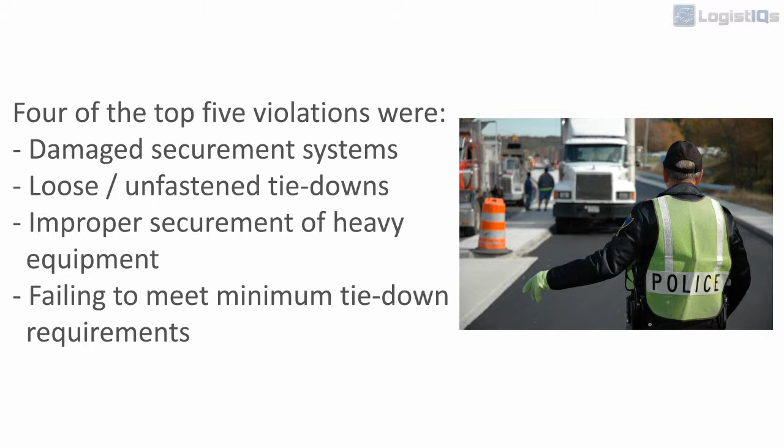In the cargo securement sphere, the most common violations found during inspections were failure to prevent shifting cargo and leaking, spilling, blowing, falling cargo. 4 of the top 5 violations were damaged securement systems, loose or unfastened tie-downs, improper securement of heavy equipment, and failing to meet minimum tie-down requirements.

Why must cargo be properly secured? The same forces you feel acting on your body while driving also act on the cargo you are carrying. Those forces are inertia, the feeling of being pulled forward out of the seat when you apply the brakes. It also applies to acceleration.

Unsecured cargo will fall forward during braking and backwards during acceleration. Centrifugal force is what pushes you to the side of your seat when you go around a curve. Unsecured cargo can fall sideways. The higher the speed in the curve, the greater the effect.

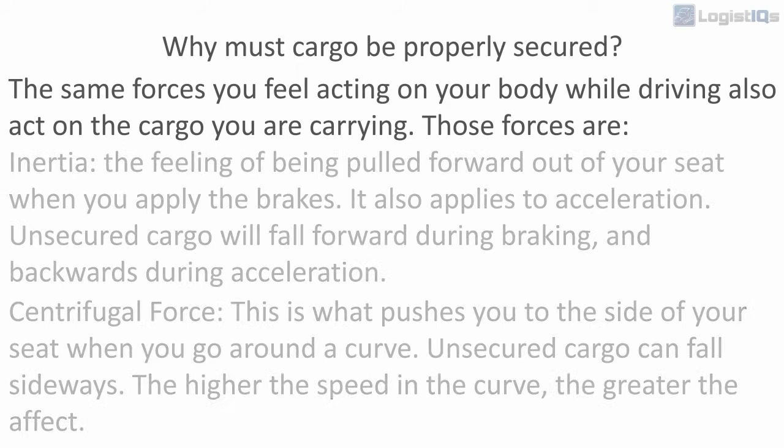Gravity: when driving on a flat surface, gravity pushes directly downward on cargo. However, when going up or down a grade, gravity will push unsecured cargo the direction of the grade.

The NACSS requires that cargo must be contained, immobilized, or secured. It may not leak, spill, or blow, may not fall from or otherwise become dislodged from the vehicle, or shift upon or within the vehicle to an extent that the vehicle's stability or maneuverability is adversely affected.

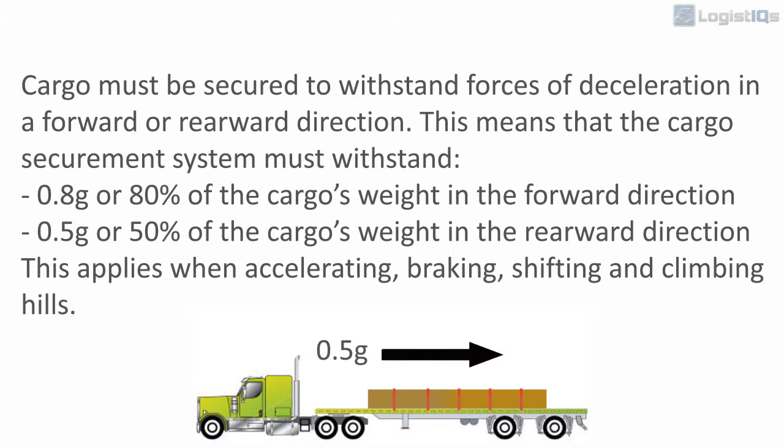Cargo must be secured to withstand forces of deceleration in a forward or rearward direction. This means the cargo securement system must withstand 0.8 g, or 80% of the secured cargo's weight, in the forward direction, and 0.5 g, or 50% of the cargo's weight, in the rearward direction. This applies when accelerating, braking, shifting, and climbing hills.

The cargo must also be secured to withstand lateral forces. It must withstand 0.5 g, or 50% of the cargo's weight, in either side direction. This applies when turning, braking while turning, and changing lanes.

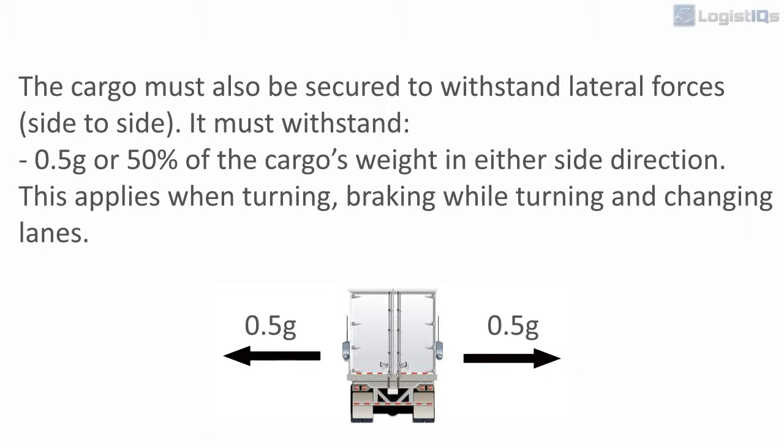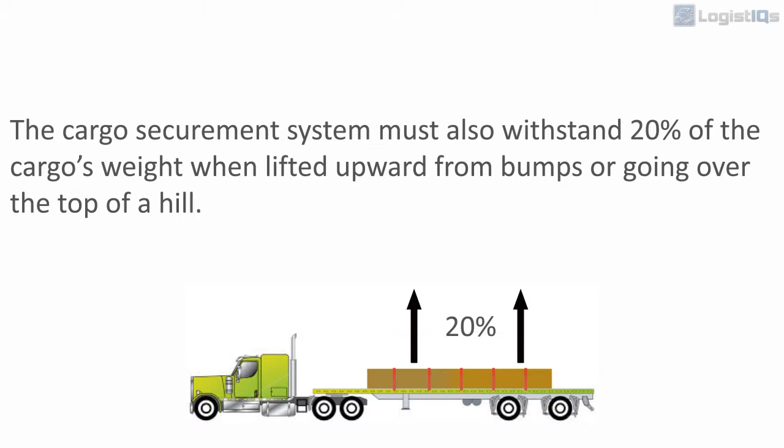The cargo securement system must also withstand 20% of the cargo's weight when lifted upward from bumps or going over the top of a hill. Securing the cargo with tie-downs will usually meet this criteria. If the cargo is fully contained in a strong enough structure, it may also meet the requirements.

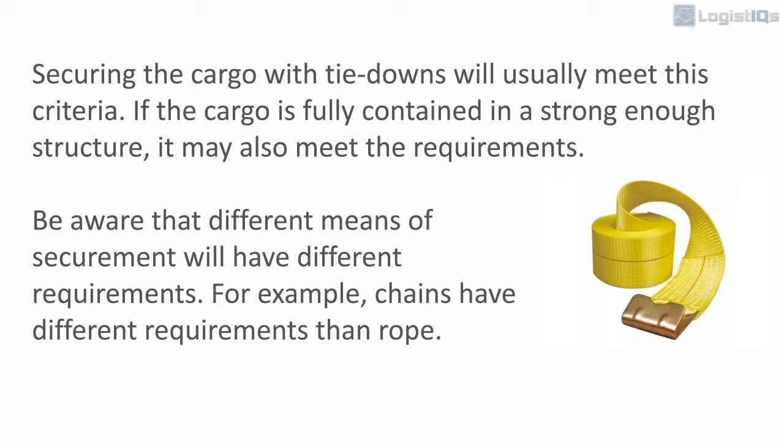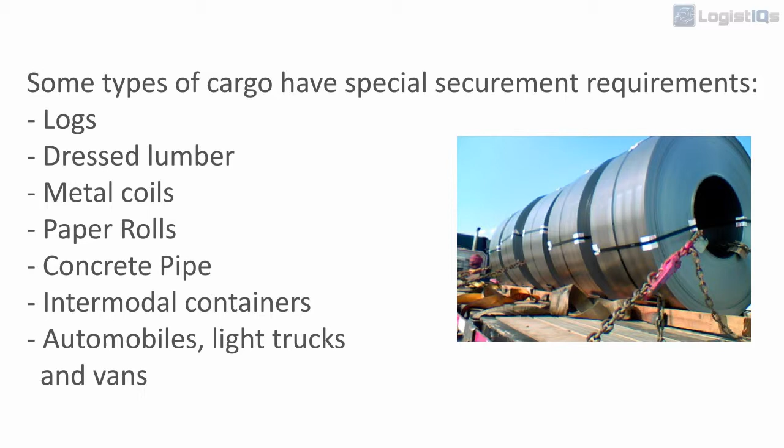Be aware that different means of securement will have different requirements. For example, chains have different requirements than rope. Some types of cargo have special securement requirements: logs, dressed lumber, metal coils, paper rolls, concrete pipe, intermodal containers, automobiles, light trucks and vans, heavy vehicles, equipment and machinery, flattened or crushed vehicles, roll-on, roll-off containers, and large boulders.

Avoid a rollover. Commercial vehicles have a higher center of gravity than most vehicles. As loads are added, the center of gravity moves even higher. This gives commercial vehicles a much higher chance of a rollover.

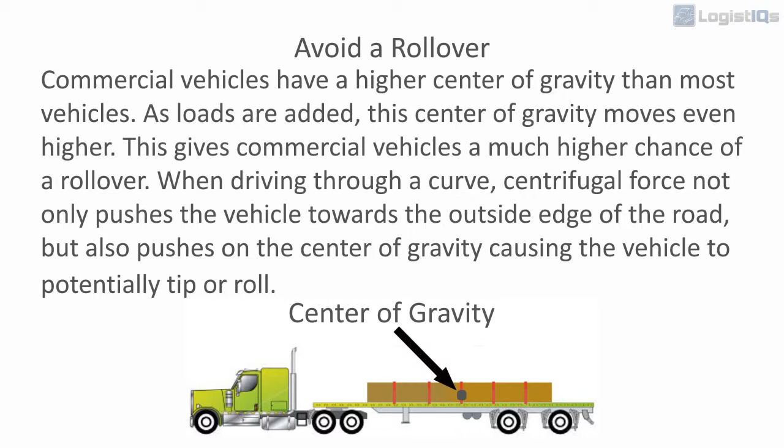When driving through a curve, centrifugal force not only pushes the vehicle towards the outside edge of the road, but also pushes on the center of gravity, causing the vehicle to potentially tip or roll. Any corner taken at too high of speed will cause a rollover, but unsecured or unbalanced cargo amplifies the chance it will happen.

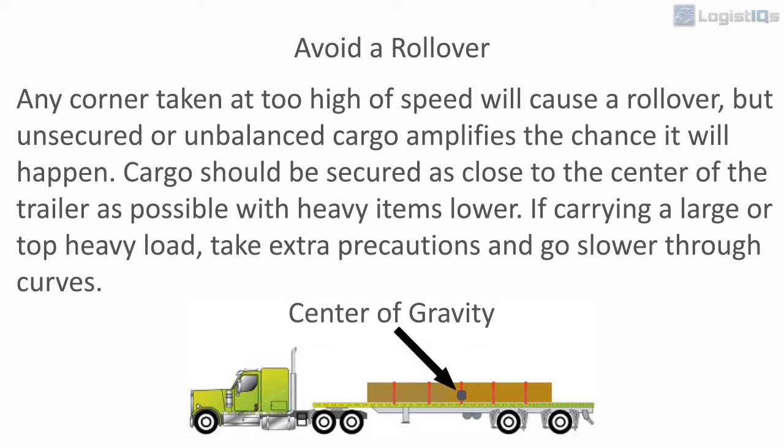Cargo should be secured as close to the center of the trailer as possible, with heavy items lower. If carrying a large or top-heavy load, take extra precautions and go slower through curves.

Driver and carrier responsibilities: besides securing the cargo, various parts of the vehicle structure itself must also be secured. These include tailgate, doors, spare tires, cargo securement equipment, and any other equipment.

Any point on the vehicle used to secure cargo must be in proper working order when used to secure cargo, with no obvious damage, distress, weakened parts, or weakened sections. The cargo itself must not obscure the driver's view ahead, left or right, interfere with movement of the driver's arms and legs, prevent free and ready access to emergency supplies and equipment, or prevent free and ready access of any person from the commercial vehicle's cab or driver's compartment.

Penalties for unsecured cargo, depending on the jurisdiction, can be fines to the driver or carrier and/or the vehicle being placed out of service.

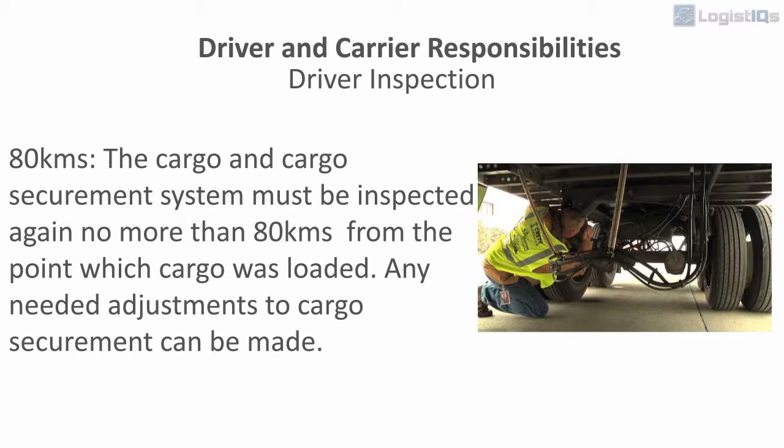Driver inspection. Pre-trip: before beginning a trip, cargo and cargo securement equipment must be checked to ensure compliance with regulations. The cargo and cargo securement must be inspected again no more than 80 kilometers from the point which the cargo was loaded, and any needed adjustments to cargo securement can be made. Inspect cargo and cargo securement every 240 kilometers or 3 hours, whichever is first, or at a change in duty status.

Packaging. If a package collapses or crumples in transit, cargo may shift or fall as the tie-downs have loosened. Though shippers usually are responsible for packaging, you must still inspect it to ensure there are no problems. If a problem is encountered, it is your responsibility to notify your carrier. Examples you may encounter include loose or improper banding on a package, improper wrapping, or broken pallets.

Loading and placement. Loads should be centered with weight low and evenly distributed. For example, no more than 60% of cargo weight on 50% of the deck.

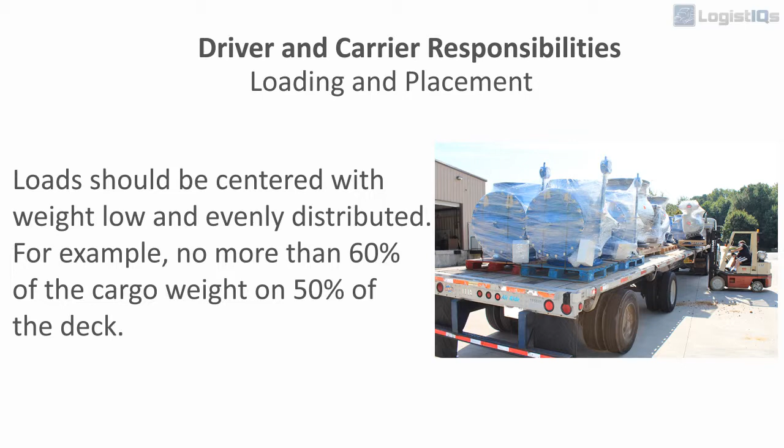Cargo securement. A cargo securement system includes the structure of the vehicle, any securement devices, and blocking and bracing equipment. To be in compliance with the NACSS, the cargo securement must satisfy one of the following: Restrained - cargo is not contained but is prevented from tipping or shifting. Contained - cargo is contained if it fills a sided vehicle and every article is in contact with or sufficiently close to a wall or other cargo so that it cannot shift or tip. Immobilized - cargo is prevented from any form of movement.

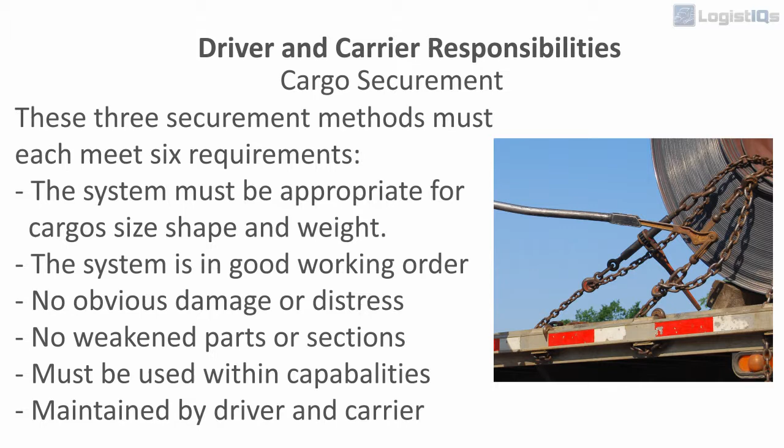These 3 securement methods must each meet 6 requirements: the system must be appropriate for the cargo's size, shape, and weight; the system is in good working order; there is no obvious damage or distress; there are no weakened parts or sections; it must be used within its capabilities; and it must be maintained by the driver and carrier.

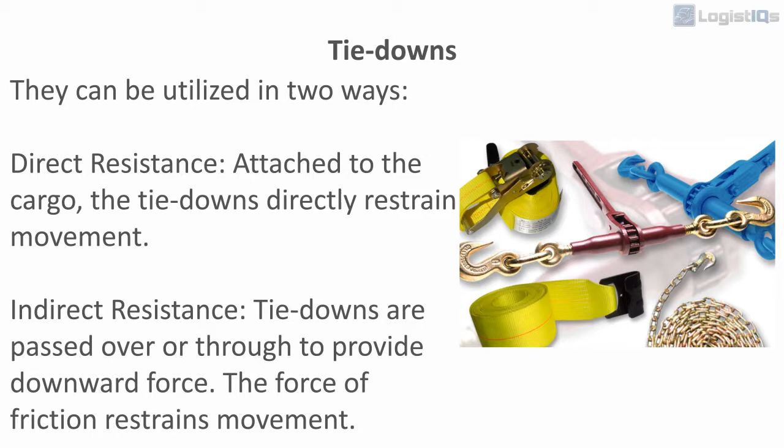Tie-downs are the most common way of securing cargo. Tie-downs attach to one or more anchor points on the vehicle to restrain the load. They can be utilized in 2 ways: direct resistance, where attached to the cargo the tie-downs directly restrain movement, and indirect resistance, where tie-downs are passed over or through to provide downward force, and the force of friction restrains movement.

A tie-down must meet the following requirements to work effectively. A tie-down, except for steel strapping, must be designed, constructed, and maintained so that the driver of the vehicle can tighten it. Each tie-down must be attached and secured in a manner that prevents it from becoming loose, unfastening, opening, or releasing while the vehicle is in transit.

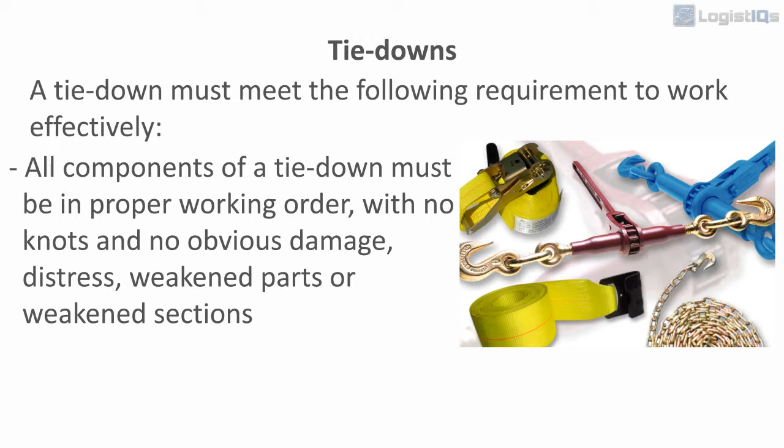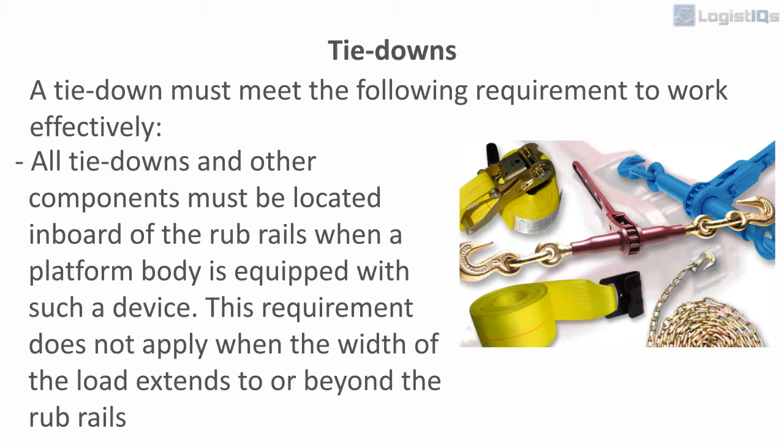All components of a tie-down must be in proper working order with no knots and no obvious damage, distress, weakened parts, or weakened sections. All tie-downs and other components of a cargo securement system must be located inboard of the rub rails when a platform body is equipped with such a device. This requirement does not apply when the width of the load extends to or beyond the rub rails.

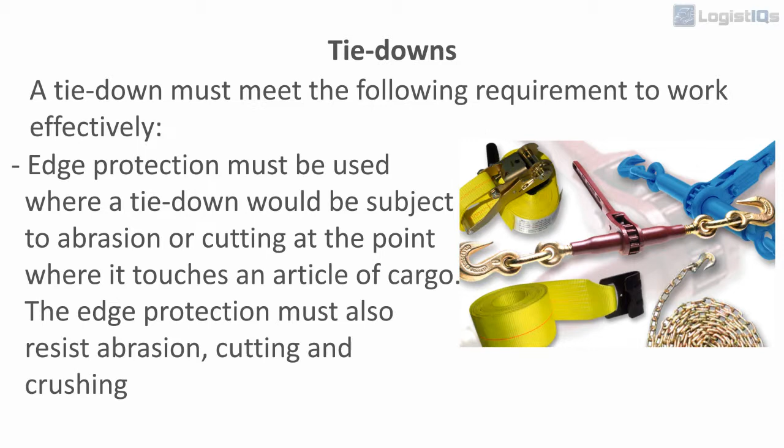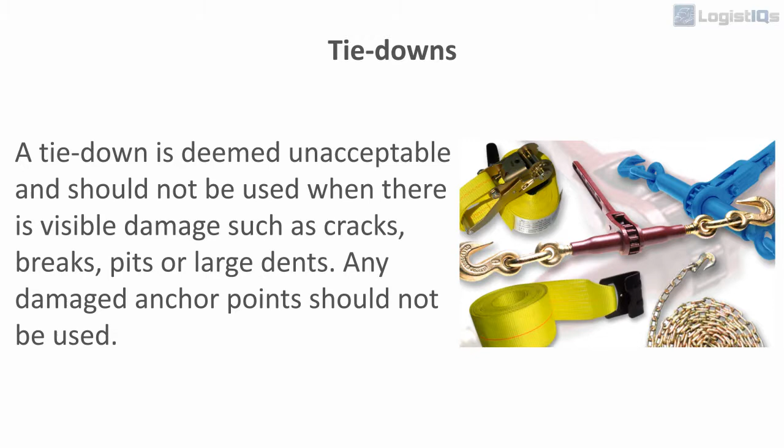Edge protection must be used where a tie-down would be subject to abrasion or cutting at the point where it touches an article of cargo. The edge protection must also resist abrasion, cutting, and crushing. A tie-down is deemed unacceptable and should not be used if there is visible damage such as cracks, breaks, pits, or large dents. Any damaged anchor points should not be used.

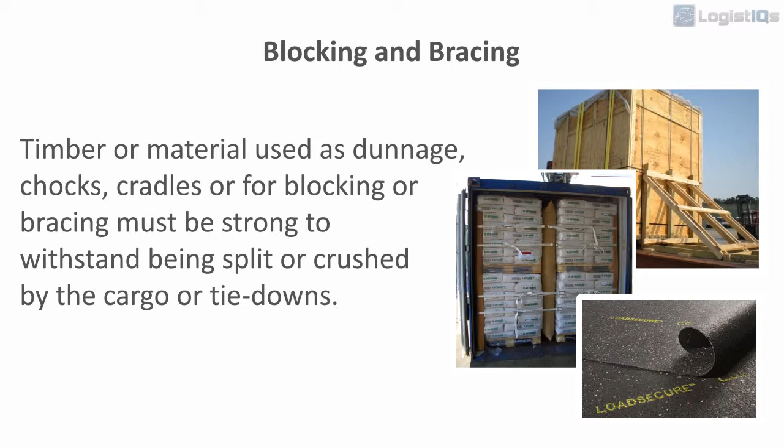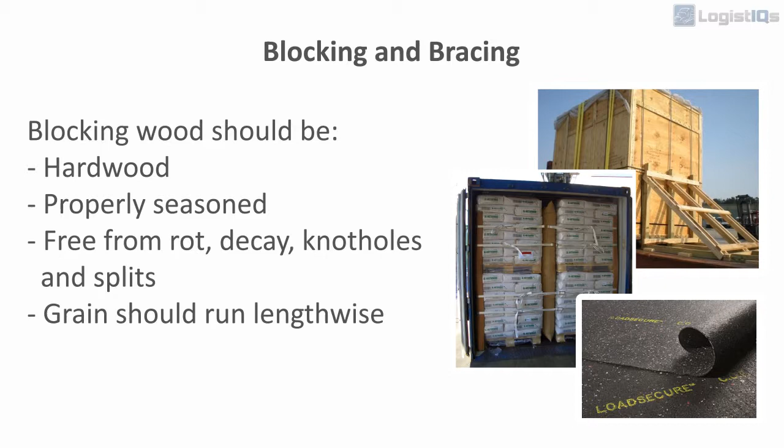Blocking and bracing. Timber or material used as dunnage, chocks, cradles, or for blocking or bracing must be strong enough to withstand being split or crushed by the cargo or tie-downs. Blocking wood should be hardwood, properly seasoned, free from rot, decay, knots, knot holes, and splits. Grain should run lengthwise.

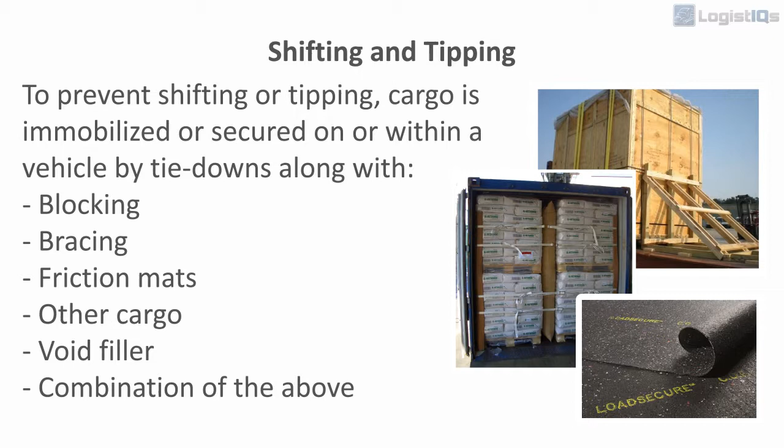Shifting and tipping. To prevent shifting or tipping, cargo is immobilized or secured on or within a vehicle by tie-downs, along with blocking, bracing, friction mats, other cargo, void filler, or a combination of the above.

Rolling. To prevent articles from rolling, lift the cargo off the deck and/or place chocks, wedges, a cradle, or other equivalent means that prevent rolling. These must be secured to the deck. The method used to prevent rolling cannot become unfastened or loose while the vehicle is in transit.

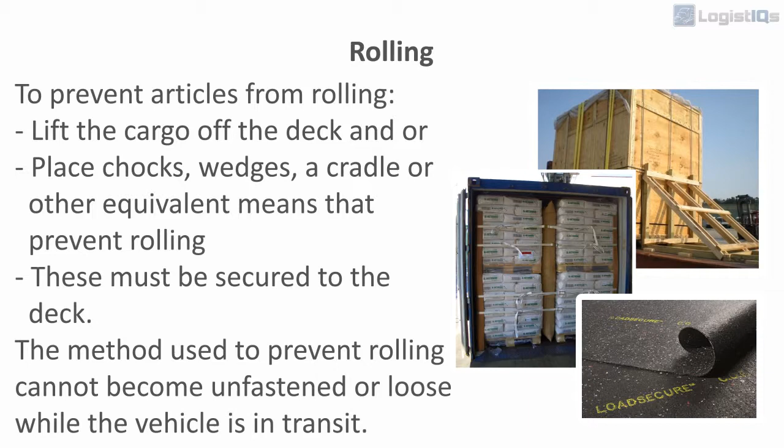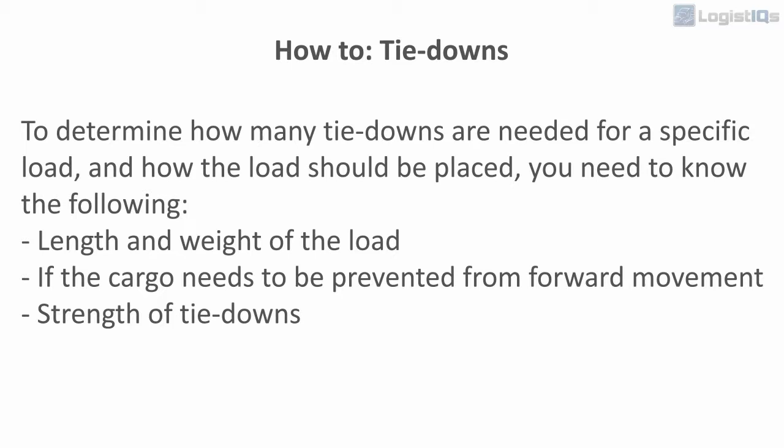How to tie downs. To determine how many tie downs are needed for a specific load and how the load should be placed, you need to know the following: length and weight of the load, if the cargo needs to be prevented from forward movement, and strength of tie downs.

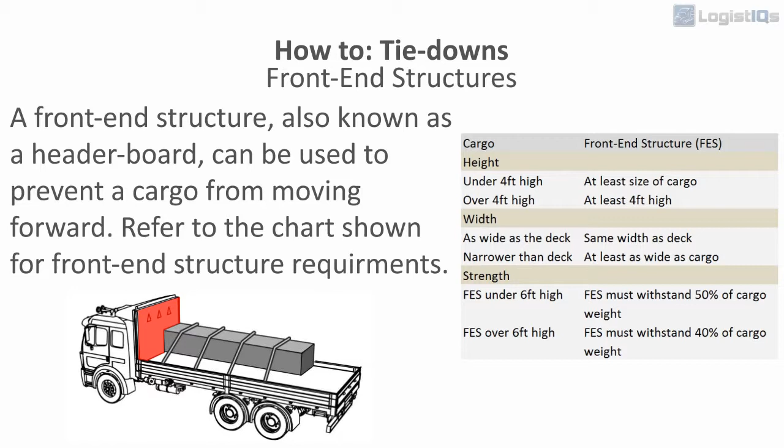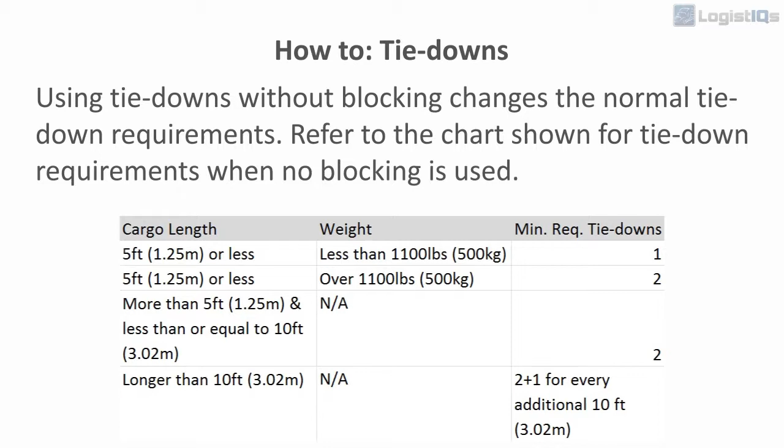Front end structures. A front end structure, also known as a header board, can be used to prevent cargo from moving forward. Refer to the chart shown for front end structure requirements. Using tie-downs without blocking changes the normal tie-down requirements. Refer to the chart shown for tie-down requirements when no blocking is used.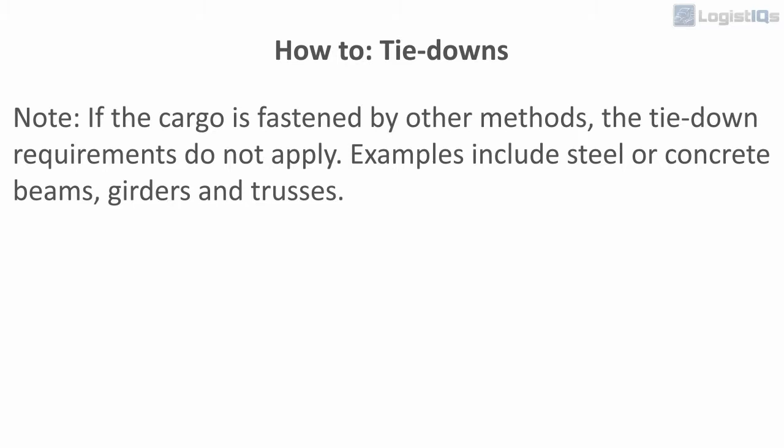Note, if the cargo is fastened by other methods, the tie-down requirements do not apply. Examples include steel or concrete beams, girders, and trusses.

Positioning tie-downs. Tie-downs should be positioned as close as possible to the spacer, as symmetrically as possible over the length of the article, to preserve the integrity of the article.

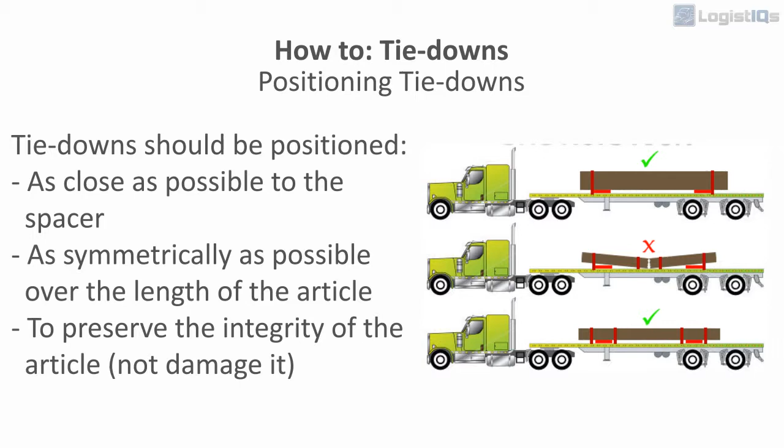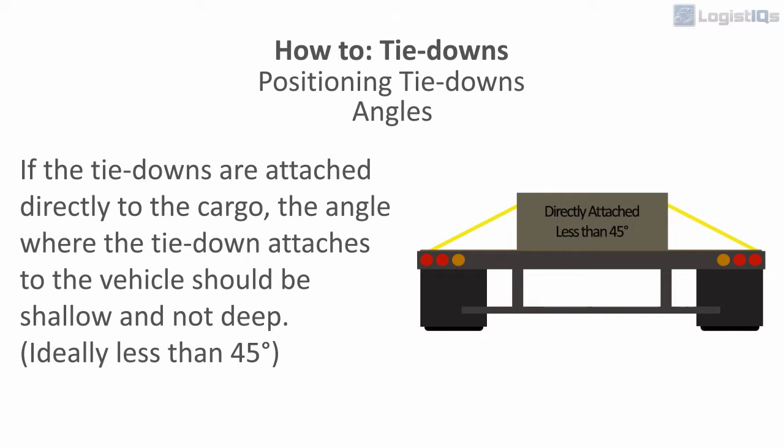Angles. If tie-downs are attached directly to cargo, the angle where the tie-down attaches to the vehicle should be shallow and not deep. If tie-downs pass over the cargo, the angle should be much steeper. The steeper the angle, the less shifting.

For best results using indirect tie-downs, tension to as high an initial tension as possible. Recheck to ensure highest tension periodically.

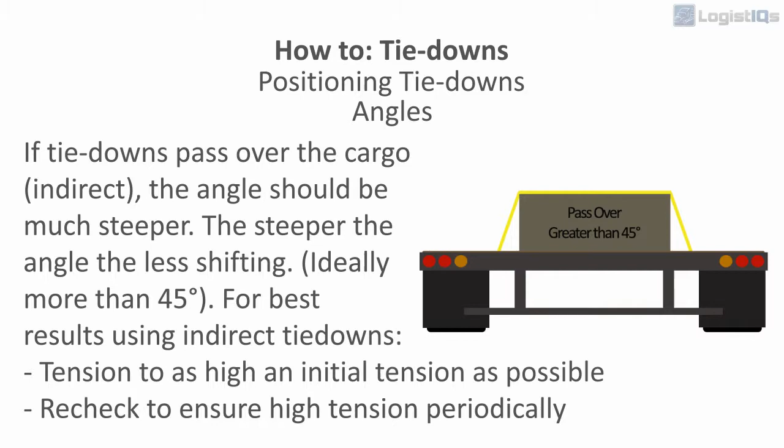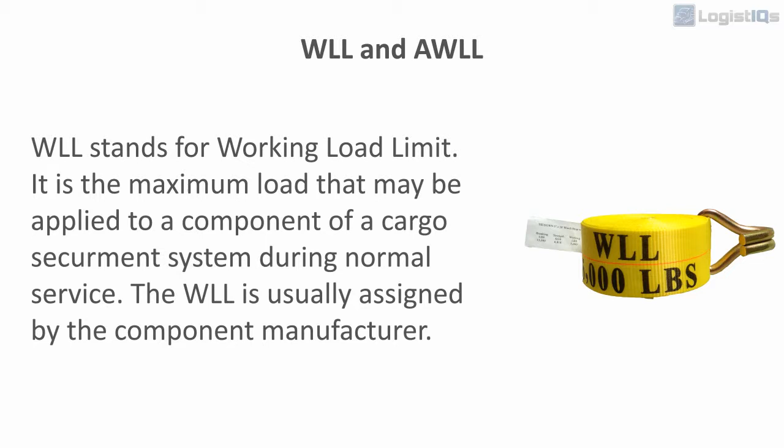WLL and AWLL. WLL stands for Working Load Limit. It is the maximum load that may be applied to a component of a cargo securement system during normal service. The WLL is usually assigned by the component manufacturer.

Component marking. Some manufacturers mark the securing devices with a numeric WLL value. The limits of these devices is equal to this marked number. Some manufacturers may mark components using a code or symbol. For example, a piece of grade 7 chain may be marked with a 70 or 700 in accordance with the standard of the National Association of Chain Manufacturers.

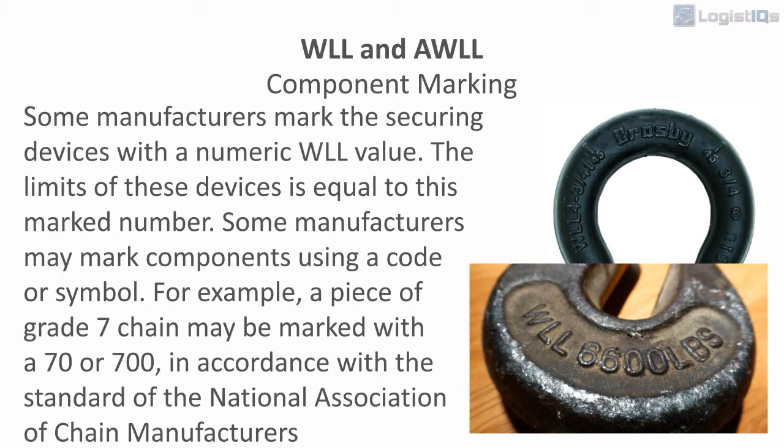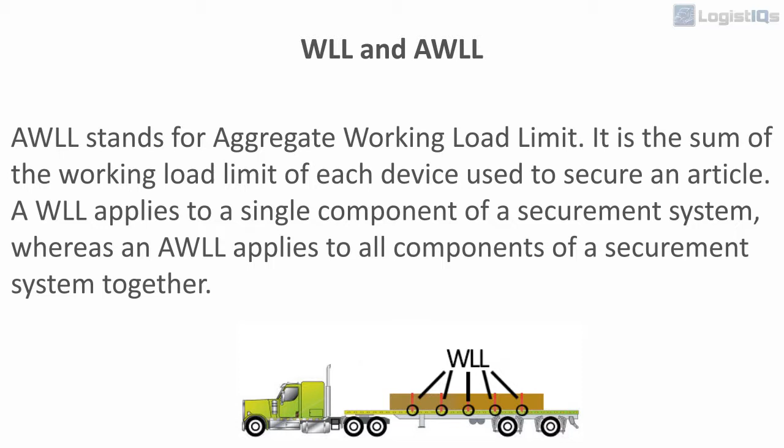AWLL stands for Aggregate Working Load Limit. It is the sum of the working load limit of each device used to secure an article. A WLL applies to a single component of a securement system, whereas an AWLL applies to all components of a securement system together. The requirement for any securement system is that the AWLL must be at least 50% of the weight of the cargo being secured.

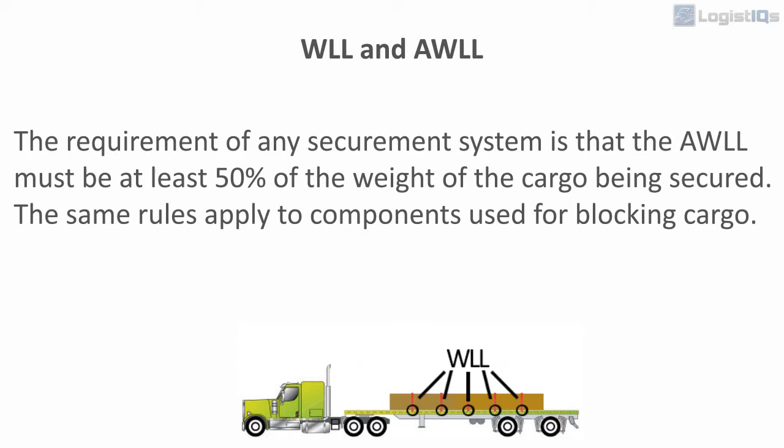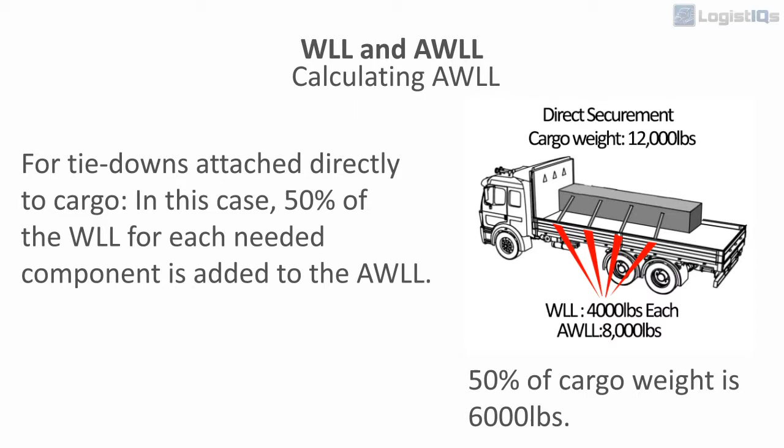The same rule applies to components used for blocking cargo. Calculating AWLL: for tie-downs attached directly to cargo, 50% of the WLL for each needed component is added to the AWLL. For tie-downs that pass over or through cargo, add the full value of the WLL for each needed component to the AWLL.

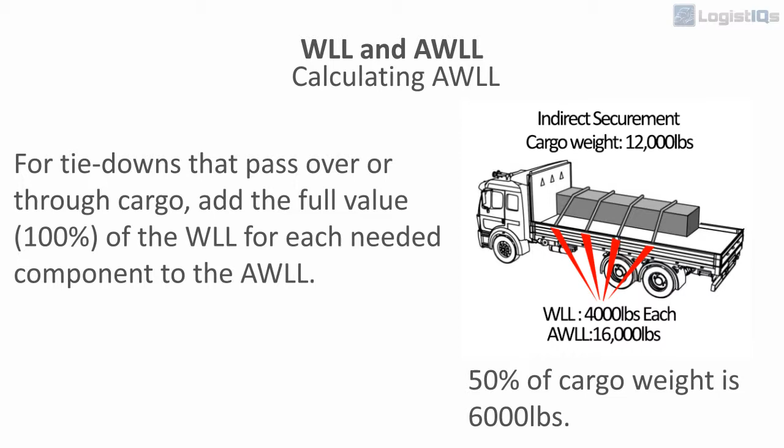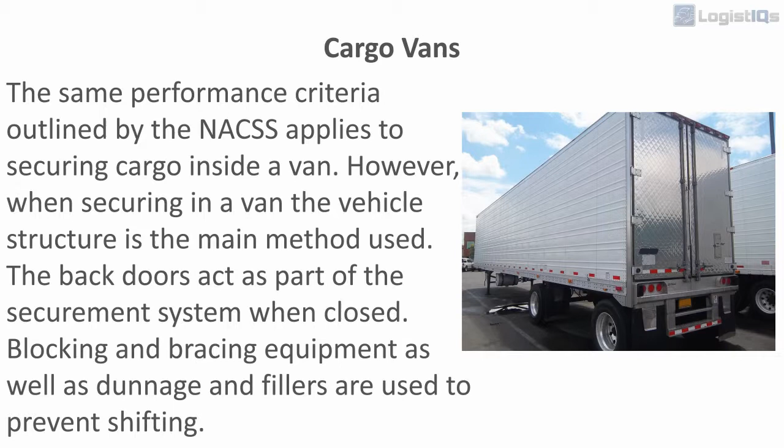Cargo vans. The same performance criteria outlined by the NACSS applies to securing cargo inside a van. However, when securing cargo in a van, the vehicle structure is the main method used. The back doors act as part of the securement system when closed. Blocking and bracing equipment as well as dunnage and fillers are used to prevent shifting.

Coverings. Coverings must be adequately secured so that they do not leak, spill, or blow off the vehicle. Inspect load covering when inspecting the cargo securement system.